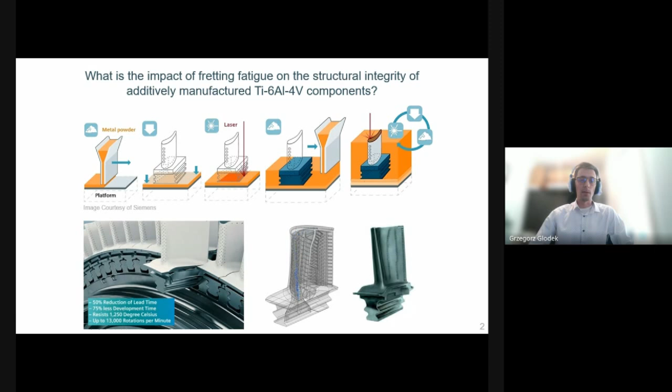This is the motivation behind my research, in which I'm investigating the impact of fretting fatigue on the structural integrity of additively manufactured Ti6Al4V components. In this presentation, I will first give a very brief introduction to fretting fatigue, and I will go over the experimental and numerical methodology.

Afterwards, I will present some of the results that I've obtained so far, and I will finish the presentation with a short conclusion. So starting with a short introduction to fretting fatigue, it occurs due to changing external forces, for example caused by changes to the RPM of the turbine engine, or due to vibrations, and those generate cyclic contact forces and relative displacement between two parts under pressure.

In this case, it's the blade and the disc in a turbine assembly.

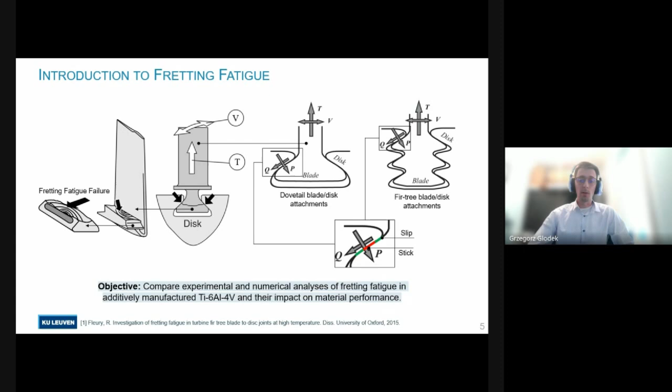The most damaging condition takes place when slip occurs at the edges of contacts, but we have a stick condition in the middle, and this results in significant damage to the contacting surfaces, which is greatly detrimental to their fatigue lifetime. Fretting fatigue can be a challenging phenomenon to study, and it often requires an experimental and numerical approach.

In the next few slides, I'll go over the methodology I used in my research, starting with the selective laser melting process itself. The material in question is Ti-64, and the parts were manufactured using a 3D Systems Pro X 320 metal printer. The density of the final components is equal to 99.6% of the theoretical density, around 4.4 grams per cubic centimeter.

After the printing process, the parts underwent standard heat treatment at 850 degrees in an argon atmosphere for 2 hours, and were later cut to the final dimensions using wire EDM, which resulted in a final surface roughness Ra value of 0.9 micrometers.

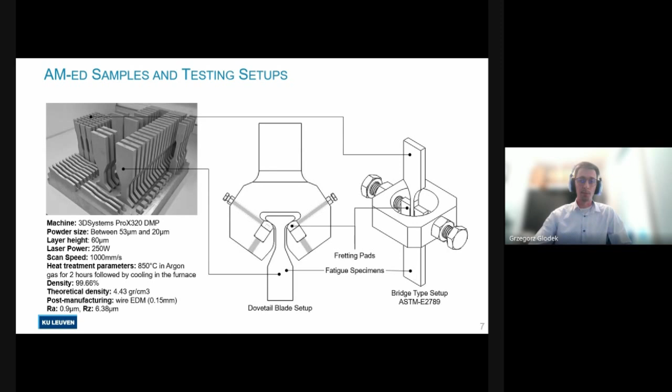In this presentation, I will mainly focus on the results of the dovetail blade setup shown here in the middle. But first, just a few more words about the material properties.

Here we can see the stress-strain curves of the wrought and additively manufactured material. As you can see, the additively manufactured Ti-64 has both lower stiffness and lower yield and ultimate tensile stresses than the wrought material, but it has somewhat higher ductility. The strain before failure is higher, as you can see here.

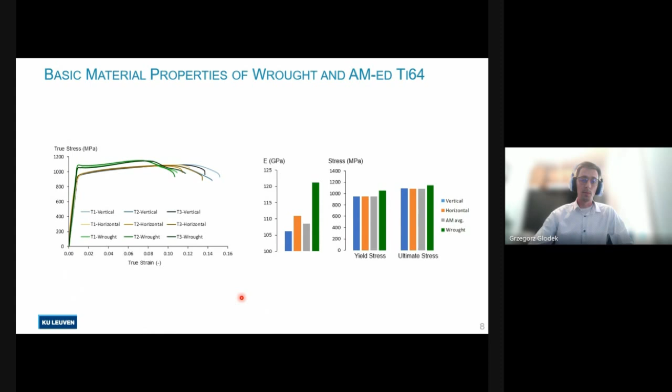The microstructure is also pretty standard for additively manufactured Ti-64 that underwent heat treatment below its beta transus temperature. The columnar prior beta grains are still relatively clearly visible, and the microstructure consists of a mixture of lamellar alpha and beta phases.

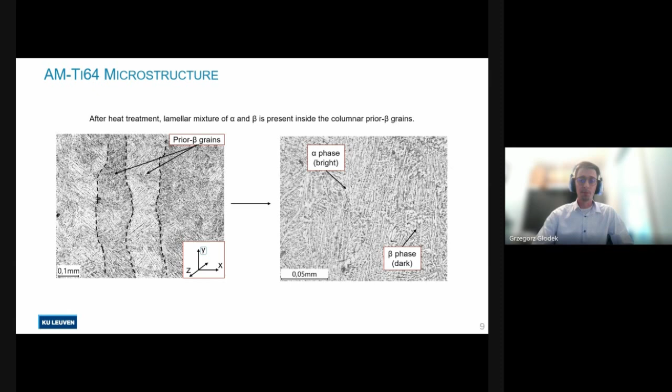Now the experimental setup is shown here on the left. The stainless steel fixture holds fretting pads, which are made from wrought Ti-64, and those represent the disc in the turbine assembly. The application of a cyclic fatigue load to the sample generates cyclic forces in contact and cyclic relative displacement between the sample and the pad, which creates fretting fatigue conditions there.

The geometry of the sample is also shown here. The most important part here is probably the skew angle, which is chosen to be 35 degrees. Also, two different fretting pad geometries were considered in the study: one with a cylindrical contact edge, which results in incomplete contact, and one with a flat contact edge, which results in complete contact.

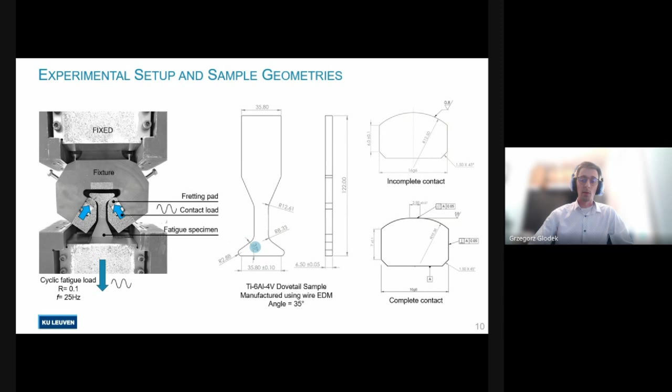The setup was also recreated in finite element software in order to study the stresses in contact in more detail.

A convergence study revealed that the minimum mesh size should be 10 micrometers, and the used coefficient of friction was equal to 0.55.

If we look at the principal stress contour in the dovetail portion of the sample, we can see there is a stress concentration at the edge of contact, but there are also high principal stress fields at the curved edges as well, which is important to keep in mind.

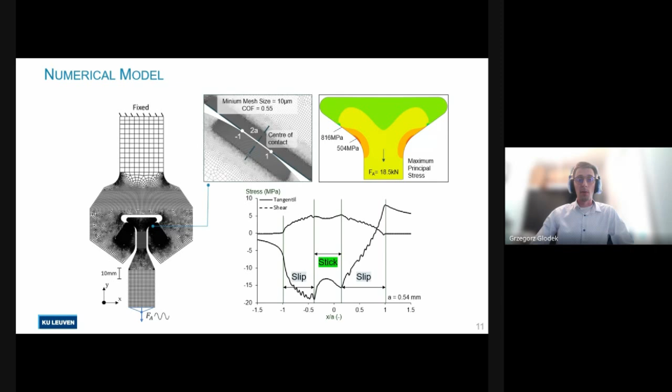If we look at the stress distribution at contact, we can see that the peak in the tangential stress is at the edge of contact, which likely drives the crack initiation there. The tangential and shear stress distributions both reveal a stick-slip condition, with stick in the middle and slip at the sides, so this is the most damaging condition, the most critical one to study.

That about covers it for the most important aspects related to methodology. I'll start the results section with some results of the DIC analysis of the dovetail joint setup. It was primarily performed to evaluate the symmetry of the setup and the quality of the alignment of different parts before starting the test.

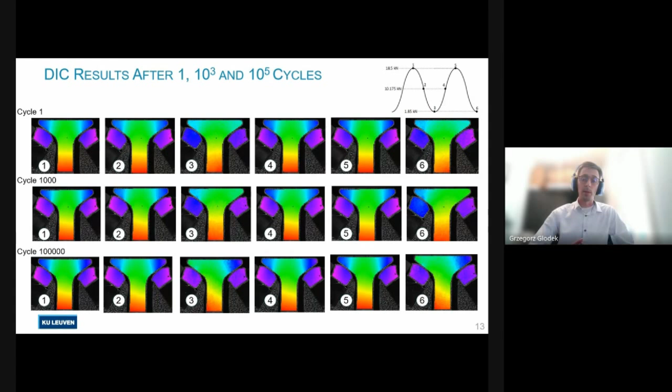Those results were also later used to determine the coefficient of friction, which could be used in finite element simulations. Displacement fields were extracted from the areas close to the contact edge and then transformed to align them with the direction of relative displacement.

Initially, the values of slip are quite different, and even though after 1,000 cycles they become closer to each other, they're still quite high. So it's very likely that we are still dealing with some initial running-in phenomena. Only after 100,000 loading cycles can we be sure that the setup is in a stable condition.

We can use those slip amplitude values to calibrate the coefficient of friction in our finite element model. This was done by performing a parametric study with different coefficients of friction and extracting the displacements in the same region, in much the same way as in the DIC analysis. That resulted in a coefficient of friction equal to 0.55.

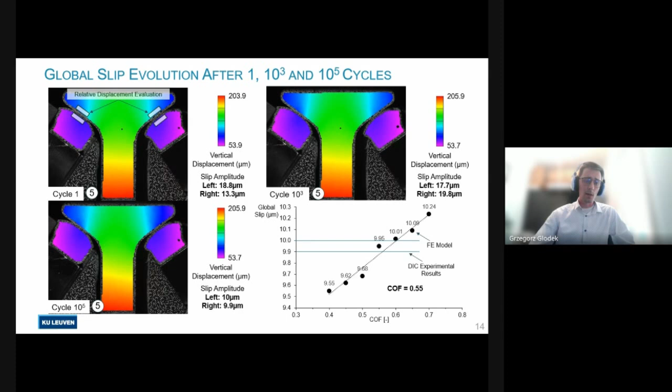For the rod material, it was mainly a failure at the curved edge. For the additively manufactured material, the failure also occurred at the neck here, or the transition zones, but I will talk about it more in a second.

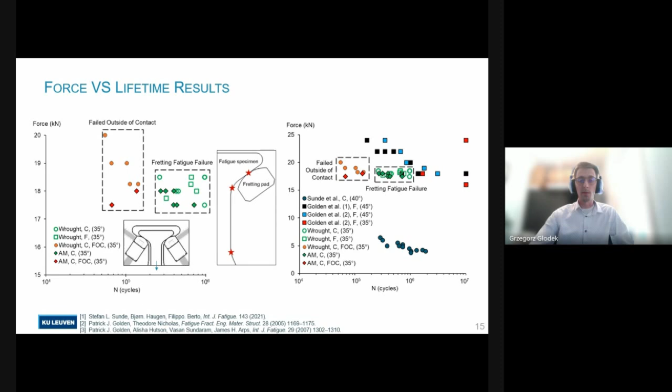But comparing it using force is not very representative, since we're dealing with different contact geometries and different sample geometries as well. Therefore, those models were recreated in finite element software to use more local parameters for that comparison. But that came with its own set of challenges, as a lot in a lot of the past research...

The tests were done at very high stresses, far into the plastic region, but that wasn't really addressed in that research back then. So instead, another critical fretting fatigue parameter could be used for comparison, and that is the slip amplitude at the contact edge. Based on this comparison, the AM material appears to be stronger than the conventional one.

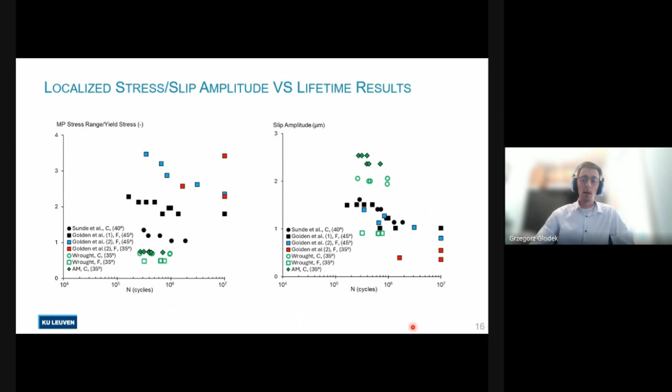But we can take this comparison a step further and include the properties of the material, like the yield stress and the stresses at the contact edge, into a sort of a damage severity parameter, which modifies the slip at the edge into the effective slip.

By looking at this graph, we can say that the response of the additively manufactured material under fretting fatigue conditions is similar to the rod one.

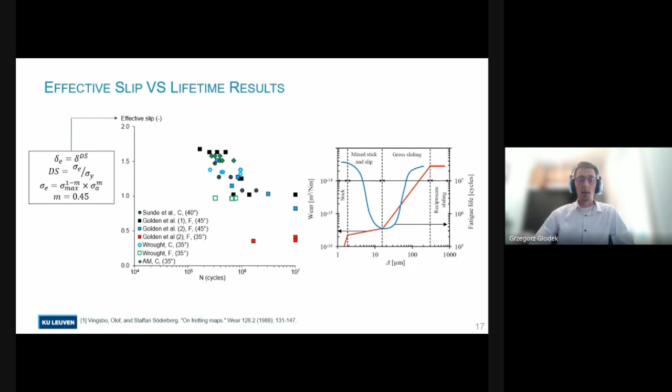We can also see a crack which resulted in failure that is present right outside the slip area. Also, interestingly, we can see a secondary crack on the other side, which initiated there, possibly at the edge, but hadn't had the chance to propagate since the failure occurred on the right side.

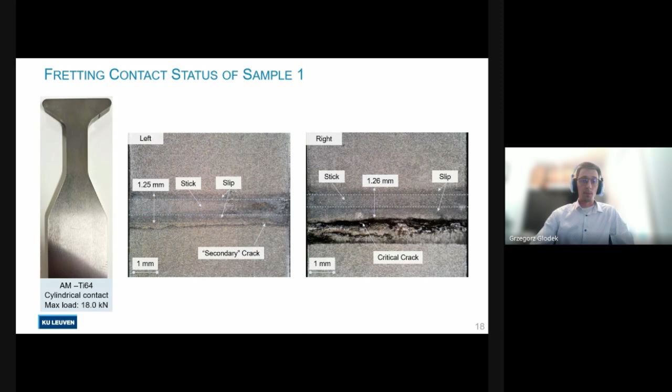If we look at the crack surface, we can distinguish two likely areas where the crack could have initiated. It's possible that the crack started growing from two regions and later coalesced into one big crack, which caused the failure of the specimen.

Also interestingly here, since we can see the contact area at a relatively high angle under the SEM, we can clearly see the difference between the slip and stick areas in fretting fatigue.

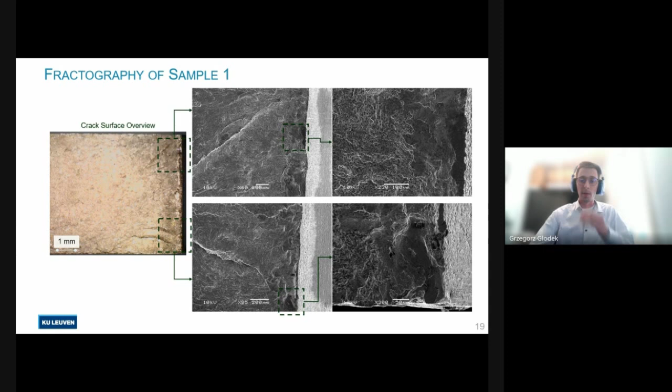Now, as I said, a number of AM samples failed outside contact, like this one, which failed at the transition zone between the curvature and the flat portion.

Further analysis revealed that the presence of a large internal defect, which acted as a stress concentration, caused this early failure due to plain fatigue.

The globular particles you can see here are likely particles of unmelted powder and point to the origin of the defect as a lack-of-fusion defect.

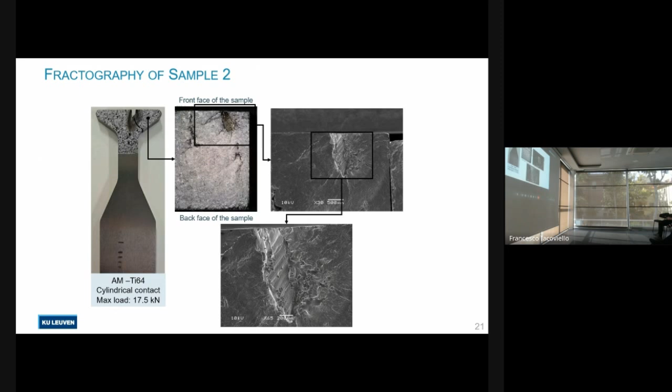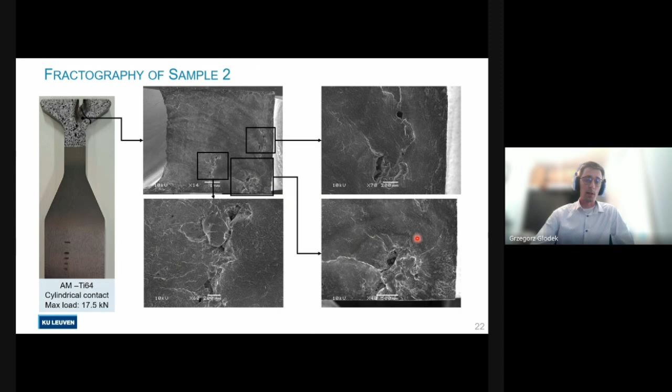If we look at the other side of the surface, we can see the other defects more clearly. Here the crack likely initiated and quickly propagated to the edge of the sample and also to the other defects, resulting in a rapid failure of the specimen.

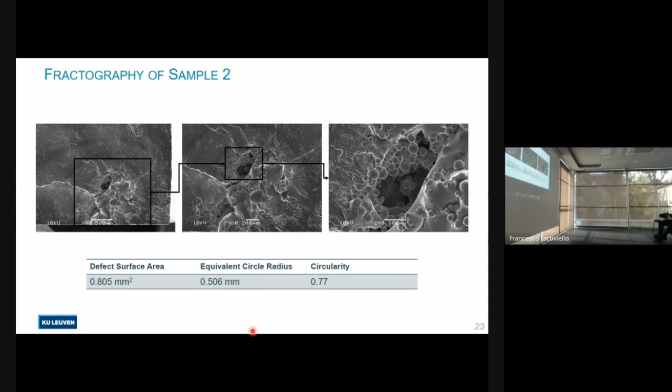Now, higher magnification pictures of the critical defect show more of the not-fully-melted globular particles and highlight just how deep the defect is. It reaches multiple layers into the material.

And some details about the defect: the approximate surface area is 0.8 millimeters squared, and the equivalent circle radius is 0.5. The defect is quite irregular, with a circularity of 0.77. For comparison, the circularity of a square is 0.7.

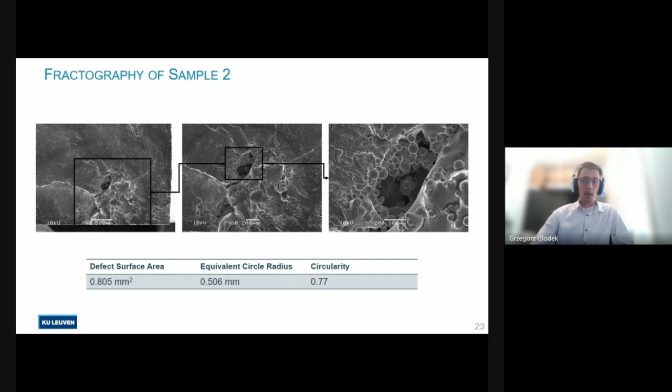I think I'm running out of time, but I'll go quickly over the next few slides.

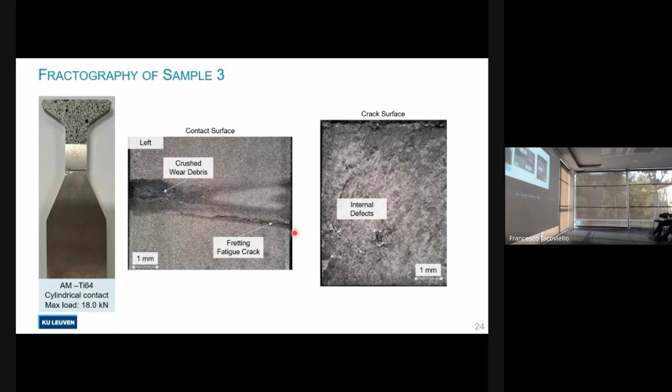This is another example of a failure out of contact that occurred due to internal defects. But in this case, the fretting fatigue crack managed to initiate but didn't have time to propagate, and the failure occurred here in the neck area.

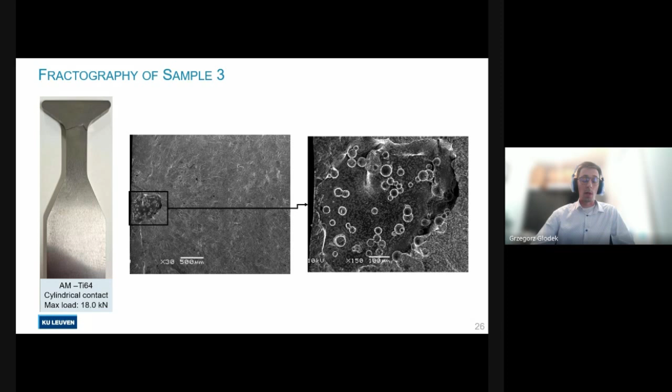A similar story applies to the last sample that failed outside the contact area. Now, also just a few more words about the finite element simulations or the modeling campaign that accompanied the experimental results.

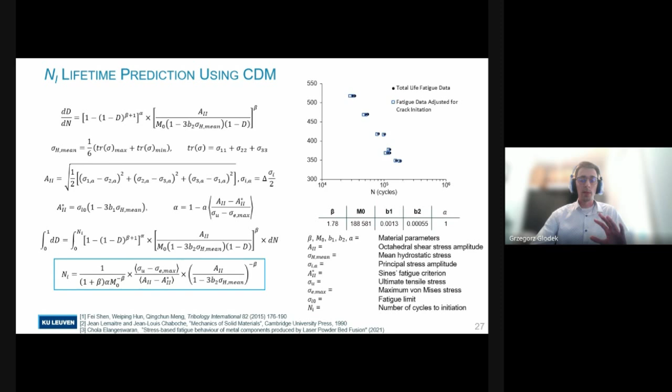The continuum damage mechanics model was used to try to estimate the lifetime of the dovetail joint additively manufactured Ti-6Al-4V components. This was used specifically for the initiation lifetime, but the propagation path and lifetime were also studied using the XFEM technique.

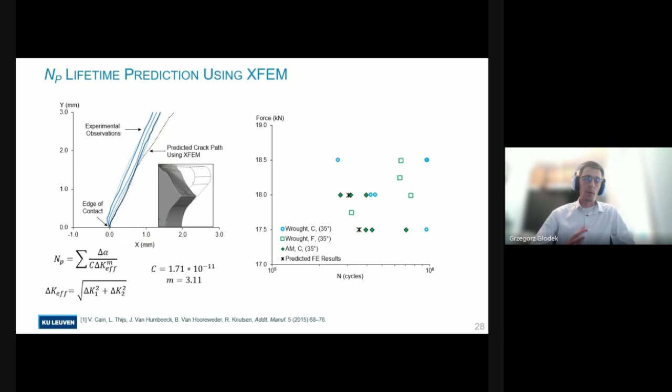Here you can also see the results of the predictions. Again, we see quite a good match with the experimental results, but this is performed on a very limited set of data, so further studies are required.

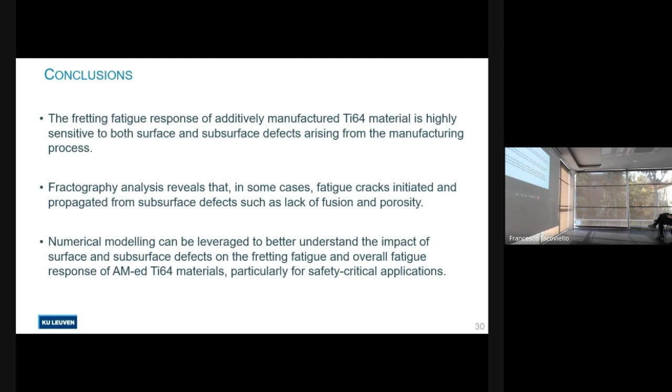And that brings me to the conclusion and the future work. The fretting fatigue response of AM Ti-6Al-4V is highly sensitive to surface and subsurface defects.

It's entirely possible for the crack to initiate in the fretting fatigue region, but the failure can occur outside due to internal defects. The next step would be to incorporate such subsurface defects in the finite element simulations and see how it will affect the lifetime and the stresses inside the sample.

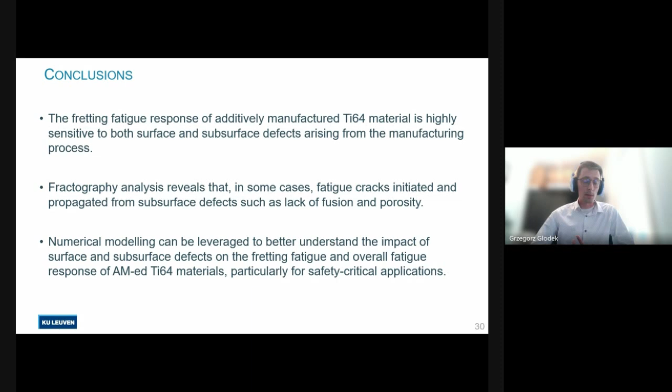And that brings me to the end of the presentation. Thank you very much for your attention.